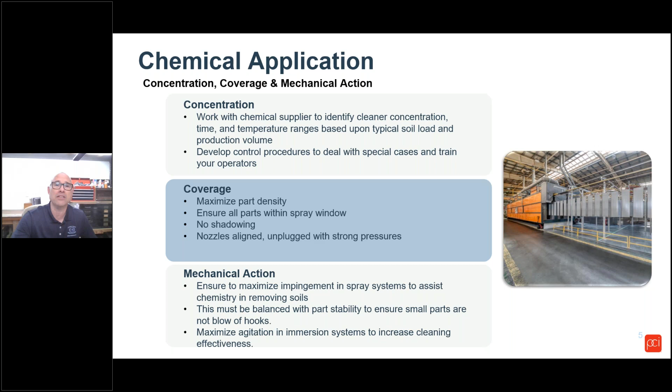If you have an immersion system, you still want to think about mechanical action in the form of agitation. You want to be moving parts in the tank, or you want the parts to be agitated, or the chemistry to be agitated in there. So again, you maximize that mechanical action.

Let's talk about chemical management for a minute. So in these three boxes that are on the slide, these are three different ways that systems are typically controlled for chemical adds. So there's manual over the side adds. So that's the lowest tech, operators just adding on a fixed schedule.

And what happens here, if you can imagine it, if you're putting parts through at a steady rate, the operator adds at the beginning of the shift, your concentrations are going to be really high, and you're going to start consuming that chemistry, and it's going to go lower and lower as it gets consumed, as it gets drug out. And then at some point later in the day, hopefully on schedule, they add it again, and the concentration has gone down, and then it's going to surge back up again. So what happens is you have times of the day where you're at an extra high concentration, and if you think about it, during that time when your parts are dragging out chemistry into the rinse stages, you're really dragging out a high concentration mixture, so you're wasting chemistry.

So then you get into fixed rate dosing pumps. So now you don't have the operator adding it, you have a pump that's putting it in at a fixed rate. If you're running the same parts every day with the same soil load and you never have line stoppages, then your concentration can be fine-tuned and it stays fairly close to what you want it to be throughout the production run. But that's not real world.

So again, a fixed rate dosing pump is better because maybe it won't forget to dose like the operator might, and you can tune your add of chemical more tightly to your production, so you're keeping that concentration in a tighter window. But you've got to worry about, like, hey, make sure that the pump's turned on, the chemical drum doesn't run dry, and that sort of thing.

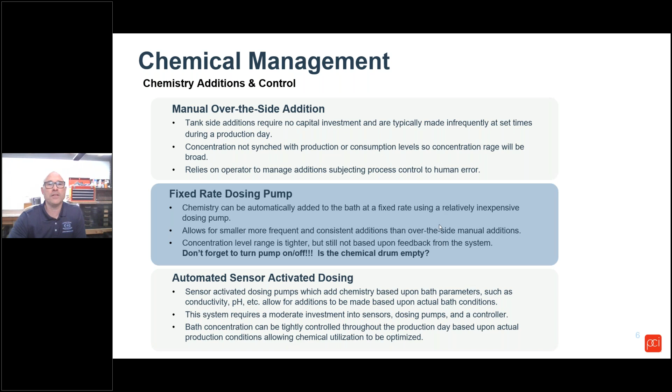All right, you'll see this diagram when we talk about rinsing again, but basically this is getting into reduce, reuse, recycle, so conservation techniques. So you're paying for chemistry, and we know that on this diagram the parts are moving from left to right, and you can see arrows going from right to left, from rinse stages back into chemistry stages. And then you see fresh water coming from the top there in the white box. So the whole idea of counterflow is you're going to take the rinse that follows a chemistry stage, and instead of adding fresh water as makeup water in the chemistry stage, you're going to use water from the subsequent rinse tank to come back into the chemistry stage.

So if you look at the diagram on the far right, rinse 3 is going back into the chemistry stage. If you look at the middle, rinse 2 is going back into that chemistry stage. This is just an example to show you that as the parts carry out chemistry from the chemistry stage into the rinse that follows it, if you take rinse water and you backflow it to make up the chemistry stage, you're recovering some of that lost chemistry, and that's exactly what we're trying to do.

And the other thing is, when you're adding fresh water, a good way to add fresh water is to do it in a misting riser that's in the stage. So rather than just pumping it into the tank where it's going to mix with the chemistry that's got soil and other things in it, you can add it through a misting riser. And you can also do this when you counterflow the stages. So the idea is the most pure water coming into a stage for makeup water, let it hit the parts first, and then let it fall down into the stage rather than going into the stage directly and mixing. You get the maximum benefit from that clean, pure water, and in this case, water with some chemistry in it.

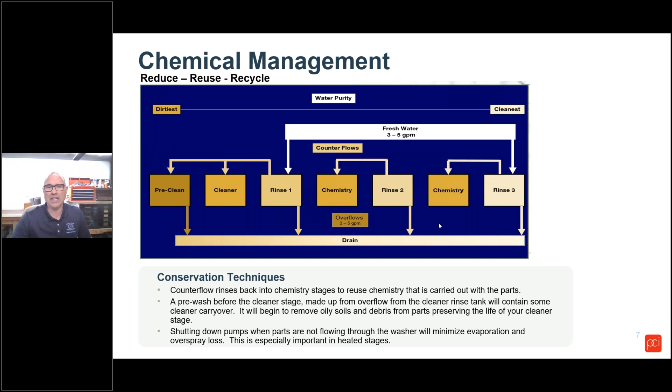And finally, another thing I'll say, just from simple controls, it's always a good idea to have some kind of photo eye or something that can shut your stages off, so you're not running pumps needlessly when parts aren't running through, so that you're not wasting chemistry and overspray and evaporation on heated stages, and you're also not wasting energy to run the pumps and that sort of thing.

All right, so moving on, we'll look at chemical management and maximizing bath life. So you want to filter the bad stuff out. Couple ways to do this. If you have cleaners that are formulated to split the oil to the top, then you can use skimmers.

There's a couple examples, belt skimmers, disc skimmers, that are shown there to kind of accumulate the oil and pull them off. If your cleaner emulsifies the oil, basically spreads it out throughout the bath, then you can use bag filters to get that out, to preserve and maximize your bath life.

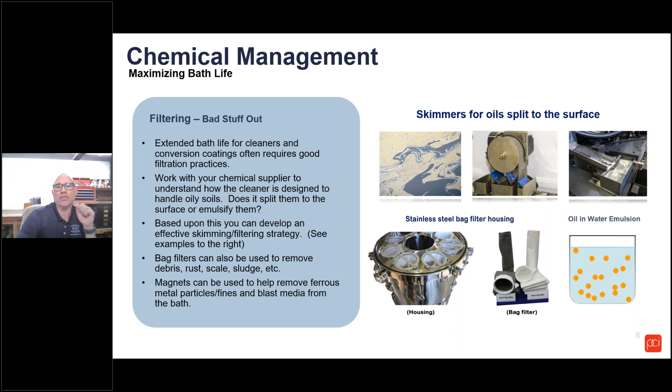One trick that I've seen that works really well is you take a bag filter and you wrap up some strong magnets and you put it down into another bag filter and you let it pull out things like metal fines, blast media, and things like that as it goes through the filter. And then when you're done, you just pull it out, unwrap that magnet, and all the fines are trapped there, and you can get rid of it. So those are some things on filtering to maximize the bath life.

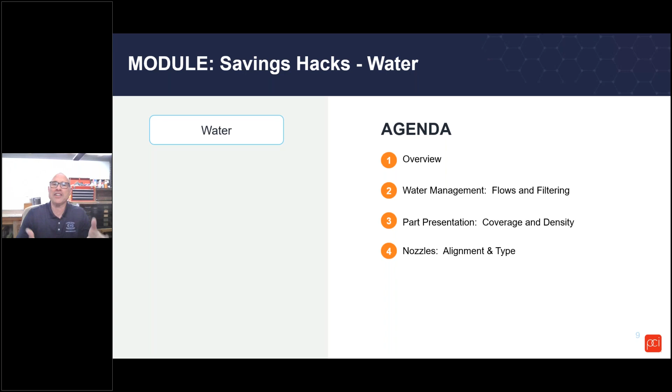All right. So we're going to move on to water. There's a lot of similarities between the water and the chemistry because if you're saving water, the baths are diluted, right? You're not using concentrated chemistry. So if you're wasting chemistry, you're also wasting water. So a lot of these things are the same, so we'll go through them quickly.

Here's the diagram again. I just want to say very quickly, as we said before, the idea of counterflow, if you have a line that has multiple rinses, which a lot of times we see if you're converting from a zinc phosphate or an iron phosphate to a zirconium that uses less stages, you might have extra stages that you use as extra rinses, or you may have already had them built into your process because they required them, and you're just deciding, I'm going to keep those stages running and I'll just have multiple rinses.

You can also counterflow from the cleanest rinse to the dirtier rinse and so on, and the idea is the same. You're just reusing that water as many times as possible before you're counterflowing it to the drain, and you're minimizing the fresh water add that you need to put in. And again, just stressing that freshwater halo or the makeup water halo in a stage to utilize that first input of water to hit the parts when it's at its freshest. All right.

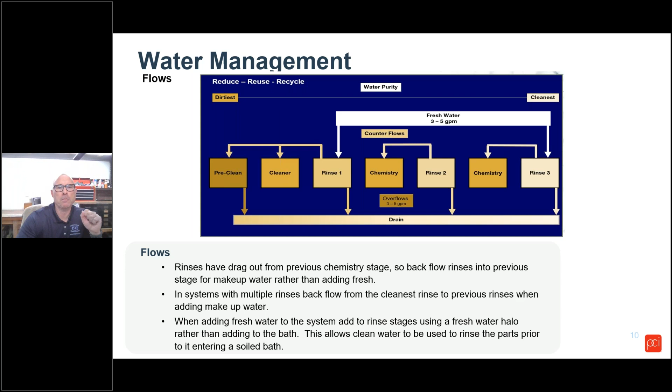I've been in lines that are very small. They're kind of Frankensteined together, and the oil will accumulate in a corner where the tank kind of eddies, and the guys just take a shop vac and they suck the oil right off the top. So, like I said, the idea is you can begin saving right now. You can begin solving headaches right now, and it doesn't have to be a high-tech solution.

I think the other thing, it may go without saying, but it's important to stress that you really want to look at balancing the overflow rates in your stages. You're overflowing your rinse water, so you're putting in fresh, or you're counterflowing, but you're taking that dirty water and it's going to drain, right? So you're overflowing. You want to make sure you dial that in, and you're balancing the effectiveness of your chemistry stages or your rinse stages to do the job they're meant to do, to clean the parts, to get them rinsed, to coat the parts.

You want to balance the amount of counterflow that it takes to preserve the cleanliness and the purity of those baths at a level where they'll do their job, but not go overkill where you're just running too much water down the drain. And again, the counterflowing between stages will help that, but you want to really look at your overflow rates as well. And that obviously is going to depend on your soil load and other things that you're facing. And again, it's important that you rely on your suppliers to really help you. Get your chemical supplier in there to help you really look at these things and dial them in.

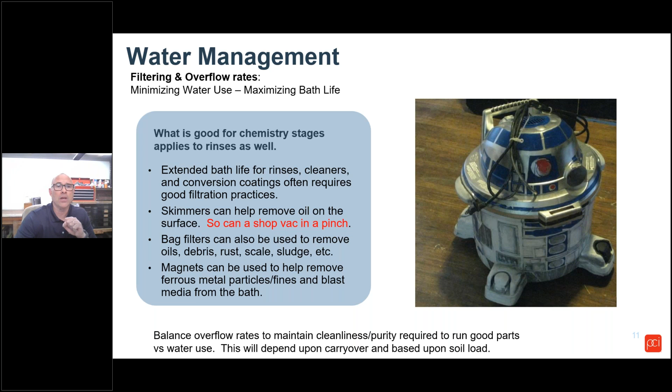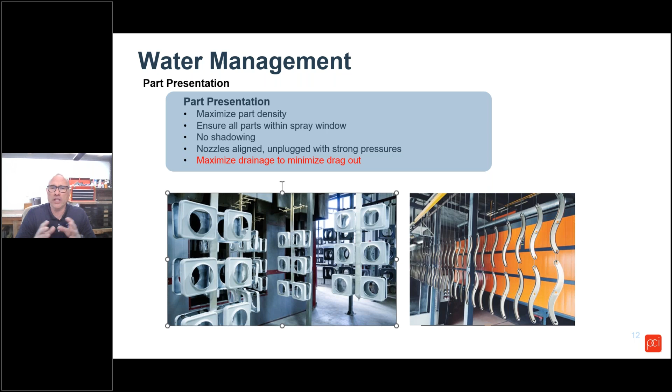Okay, I'm going to go back to part presentation again for a minute. You want to make sure that you're letting your nozzles do the work. So you want to make sure that your parts are hung in a dense fashion, that all the parts are in the spray window. There's no shadowing. But the other thing to mention here is that you really want to look at how you're hanging your parts to maximize drainage, so that you're minimizing drag out.

If you think about the flat fan nozzle, it's like when you're washing down your driveway and you're putting your finger over the end of the hose and you get that fan pattern. You're trying to increase the pressure. You're trying to maximize impingement on the part and maximize that mechanical action across a fan.

Sometimes cone nozzles are used to spread out, have less direct impact. Sometimes if you're trying to lay down a zinc phosphate or something with the crystal structure, you might want to have less impingement and a more gradual flooding to let the crystals set up and things like that. I'm not an expert on zinc phos. We try to help people get out of zinc phos, but I do know that those are the common nozzle types.

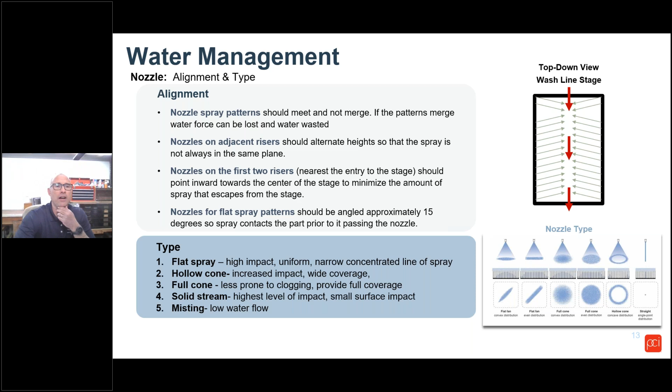Sometimes systems are set up where they don't have VFD drives, and so you're set with a pump banging away at the system, and if you want to change the pressure on your risers, you hit these throttle valves. So what you have is a pump working hard all the time, giving max delivery of flow, and you're throttling it back with these gated valves, and it's just banging against it, so you're overworking your pump for what you need.

Ideally, if you can put VFDs on there, then you can control that flow, and you can control the pressure that you have, and you can use gates just to fine tune things between different risers as you need to balance pressure, but it minimizes the work that your pump needs to do.

The other thing you can look at is if you're a job shop and you run really big parts and really small parts, and you want to shut off some of the verticality of your washer, meaning your parts are just going to run through a window, you're not going to hang them such that they cover the whole altitude of your washer. If you're putting in a system and you know that's what you're going to do, you could put your risers in zones so you have high and low, so you're not using all the risers and pumping more water than you need to and heating more water than you need to, etc.

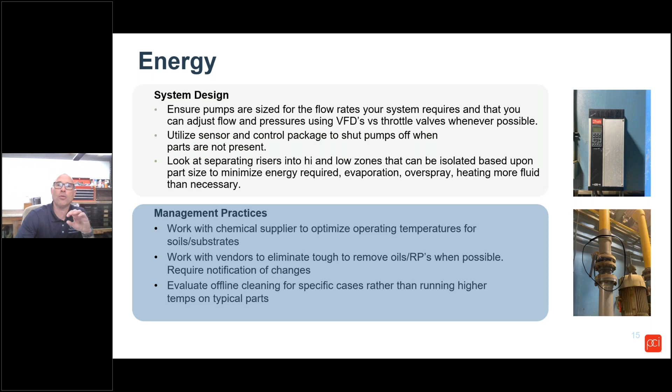The other thing on maintenance, having a preventative maintenance schedule that you follow is critical. I mean, we've been in lines that are pristine and they have a lot of flexibility when problems come. They're not chasing down the obvious things, and their operators can really quickly dial in on what's going wrong, instead of looking at lines like, oh, it's leaking here, this pump's not working right, whatever.

And one of the issues that comes into energy is descaling burners on a regular basis. Making sure you keep those clean so that you're not, again, wasting a bunch of natural gas to heat burners that aren't getting to your chemistry. You know, it's fighting itself. And then obviously you want to be on a schedule to routinely clean out your risers and your nozzles, removing that sludge so they're not blocked or plugged. And then training your operators to do that in the right way.

We've seen operators poking hard things into nozzles where it's plugged from the backside, they're poking from the outside, it just goes in and comes back and clogs, and in the meanwhile they kind of booger out the nozzle, and then you're just peeing on your parts instead of getting that distribution you paid money for, if you will. Sorry for being crass there. But anyway, blocked nozzles, misaligned nozzles, broken nozzles, all of these things cost you money and waste energy.

One point on chemistry, again, we talked about fine-tuning your temperatures for the typical case, and then having your chemical supplier help you get strategies to minimize chemical use to go after the really gnarly stuff. I mean, you'd be surprised. I've been in factories, we go in and they're just using chemicals like crazy all over the place, because the solution is always, well, up the concentration or add more chemistry, or this over the side ad will help you.

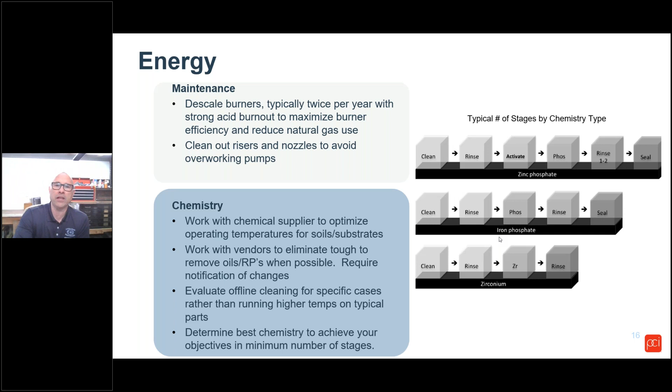All the suppliers have products out there, and they really can help you save energy because they run in less stages. They can run at ambient, so you're not heating them, and they don't produce the sludge that causes these nozzle backups and other things. So it's a lot easier on your operators, a lot easier on your system. And again, you've probably heard more about that than you want to, but this is really where it comes into play. All right. Okay.

The other thing we want to look at is maintenance, quality, and throughput. So kind of look at how you and your people are interacting with your system and with your other inputs. So at a system level, I can't stress enough, you will thank yourself if you haven't already gone through with your team and identified the failure modes that happen in your system, whether that be product failure modes, like these are paint failures on my parts, or process failure modes, like I've got clogged nozzles, or the pump went down again, or whatever.

If you look at your system and you just do a brainstorming kind of institutional knowledge dump, like what are the things that go wrong, guys and ladies, on our system, and then start getting that institutional knowledge together to say, well, when this goes wrong, what typically in the past has caused it, you begin to articulate and document this institutional knowledge. We all know we've been having trouble hiring people. There's a lot of turnover in labor. So having this to where you can quickly bring somebody up to speed is worth its weight in gold.

You also want to track your compliance of your people after you train them on these failure modes. You train them on what's required for preventative maintenance. You keep that schedule going and you document it, and you begin to help people see when the preventative maintenance doesn't happen, it triggers some of these failure modes we talked about. Which way do we want to deal with it? When it's calm, or when we've got parts backing up and people screaming and looking at us like, what are we going to do?

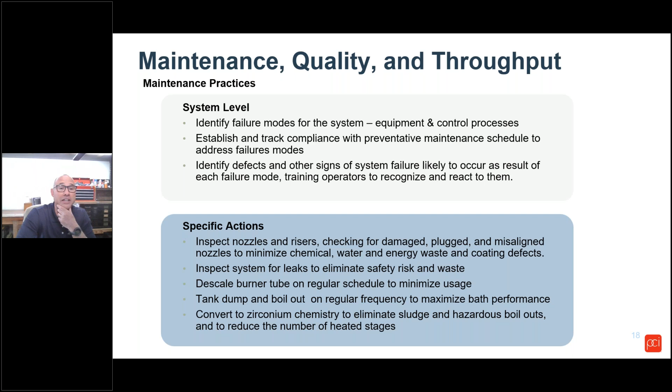And then the other thing about creating a robust process and control system is you're going to want to identify control parameters and acceptable ranges with your chemical supplier on where things should run, and have them give you a reaction plan that they recommend. What should your operators do when it goes out on the high side or the low side?

You're going to train people on those control procedures, and then you're going to have some kind of record of the checks that they're monitoring, and keep those as troubleshooting tools. You want to maintain your records of critical parameters, so you're going to want to know what your usage is. How much chemistry do I typically use? What temperatures am I typically running at?

Especially if you're in a place where the weather swings a lot, you're gonna build institutional knowledge about how things run when it's cold, when it's humid, when it's hot. These are good things to document, so that as you're bringing new people in, people don't get caught unawares.

I think this point about checklists I already made, but the next one is implementing quality agreements with suppliers, requiring advanced change notification if they change things. And again, I know it's easier said than done. They'll just blame their upstream supplier or whatever, but the idea is to get people thinking about, you expect to know what you're getting and when that changes, so that you're not getting thrown off on some new soil that's killing you.

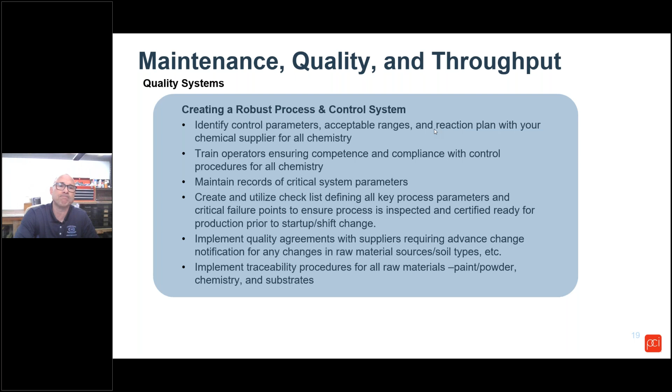All right, looking at labor and throughput for a minute, you're going to want to look at how everything moves through your system, how the process flows. You're going to want to look how materials flow through the process, how parts flow through, how people flow through each step of the stage. And you're looking for delays and stoppages. So this is just Lean Manufacturing 101. You may have heard of spaghetti diagrams.

You're going to really want to map out how everything's moving, and you're looking for ways where there's excessive or awkward handling, there's waiting, there's wasted space. Sometimes you'll look at your process and you're, geez, why do I always get flash rust right here? Well, it's probably because it's between stages and your parts are drying down, and what am I going to do to fix it?

Again, I've seen people fix it by adding over-the-side adds and chemicals, and as a chemical supplier, I should be happy about that. But really, that doesn't have to be the way to fix it. You could put misting risers in to keep the parts from drying down. It's just stuff like that you're going to want to look at.

Design part hanging recipes. I'm a big fan of visual management. So if you have recurring parts coming through, it's nice to give a visual aid for the people at the load station, almost like a shadow diagram that shows the rack that it's going to go on, or the hangers it's going to go on, and which hangers and how the parts are to be hung.

So again, you maximize that part density going through, you minimize the amount of wasted motion and labor that you need to load the parts, so they get real high efficiency load and unload. And then you're designing it for part density going through.

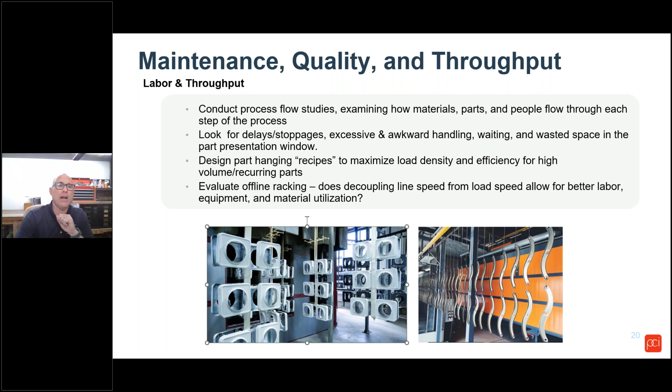That's kind of my quick storming through the different inputs and areas that make up a pre-treatment system. I certainly haven't covered everything, but these are meant to be examples in each area: chemistry, water, energy, labor, throughput, your maintenance and management systems. I hope that you found something helpful, and I'd be happy to take your questions.